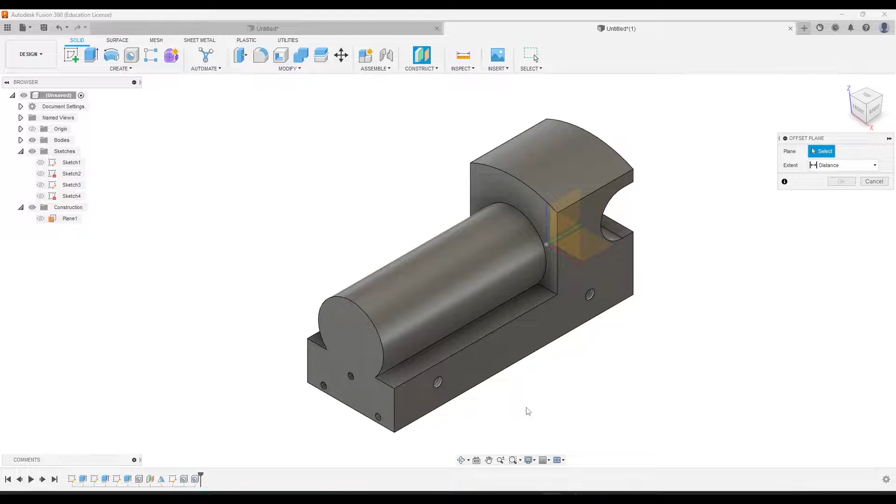Okay, so I'm going to go to the offset plane tool, and then I will click the bottom of the train. And then again, we want this plane to rest on the top of this cylinder right here. Just perfectly on the top of the cylinder. So I'm going to flip to the drawing so we can figure out that dimension. And I'm going to go down here. So again, we want the top of the cylinder.

So it doesn't give us that dimension directly. It does give us the dimension to the middle of the circle. So that is 1.375, which is most of the way there. So we want to do 1.375 plus what this distance is. And notice we're going from the center of the circle to its outer edge, so that would be the radius of the circle. So we want to take 1.375 plus the radius of the circle, which is 0.75. So 1.375 plus 0.75, which is 2.125.

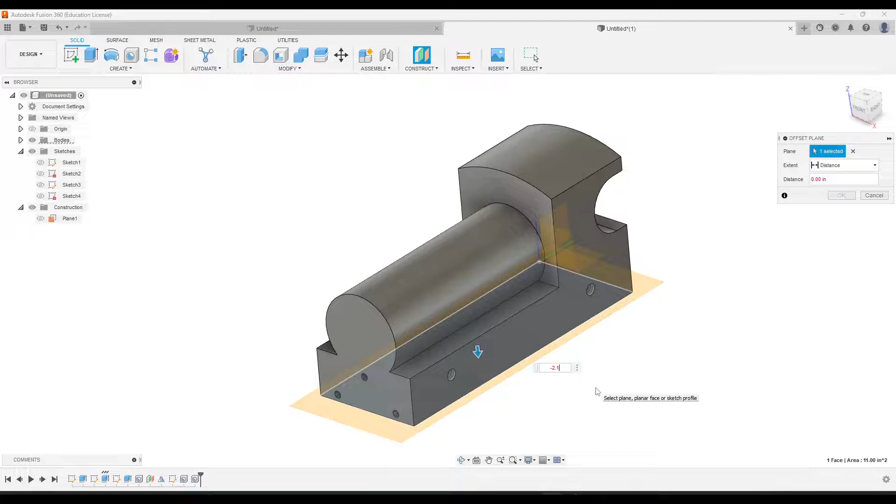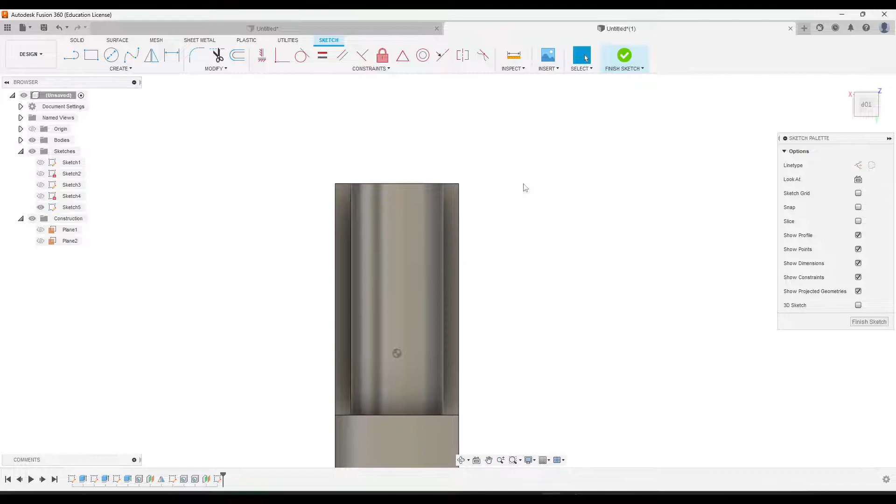So I'm going to change this. Notice it's facing down, so I'm going to make this negative 2.125. And if you notice, that should be perfectly on the top of the cylinder, which is exactly what we want. Okay, so we'll click OK. And then I'm going to click top here, and then we'll click that plane, and then we'll create a sketch. And I'm just going to rotate this to the side so I can see it a little bit better.

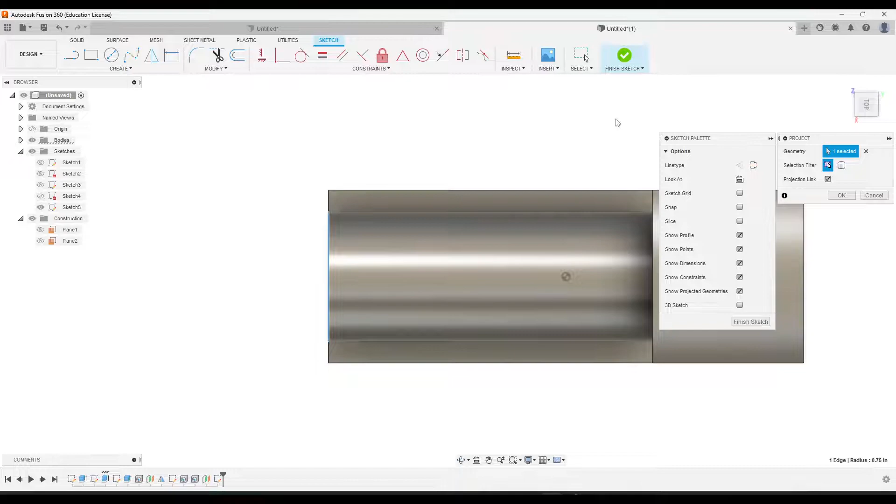Okay, so again, we need to make a circle right here. Prior to making a circle, I'm going to go to Create, Project Include, click Project, and then I will click this line here on the side because we're going to kind of reference that, and then click OK. All right, and then let's go back to the drawing and figure out what the dimension of this is. So the circle is 0.875 from that edge, and then the size of the circle is, it has a diameter of 1/2 inch.

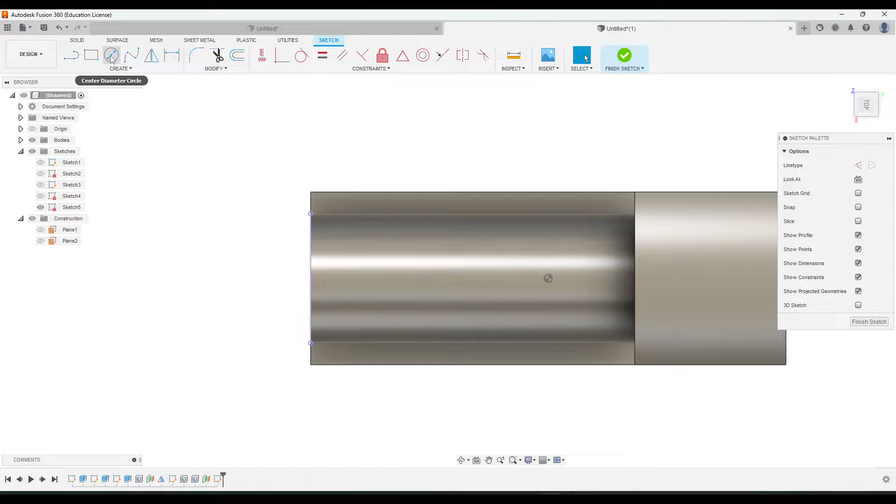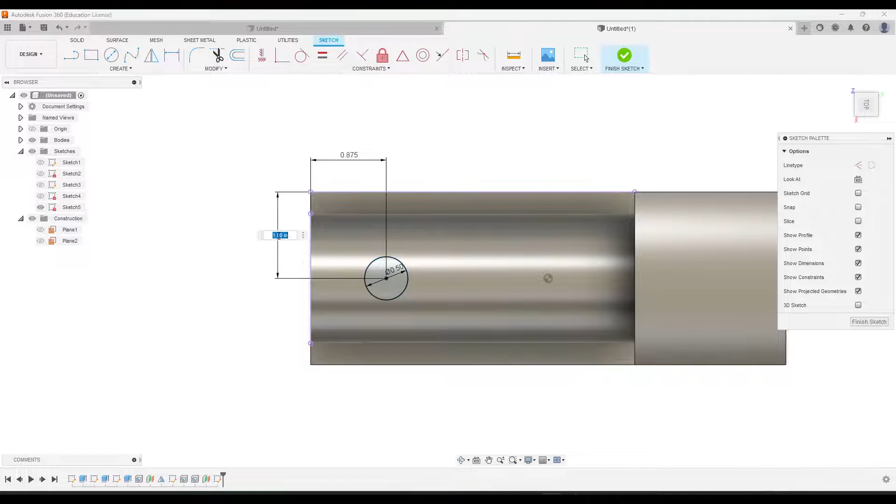So circle, and then I'll just make the circle 1/2 inch. And then again, we will dimension it from this edge to the center as 0.875. And then I'll go ahead and add the height dimension as well. And then we'll finish that. And then all we need to do now is just extrude this down. So I'll click the circle, go to extrude, change this to cut. And that needs to go down 0.25. We'll click OK.

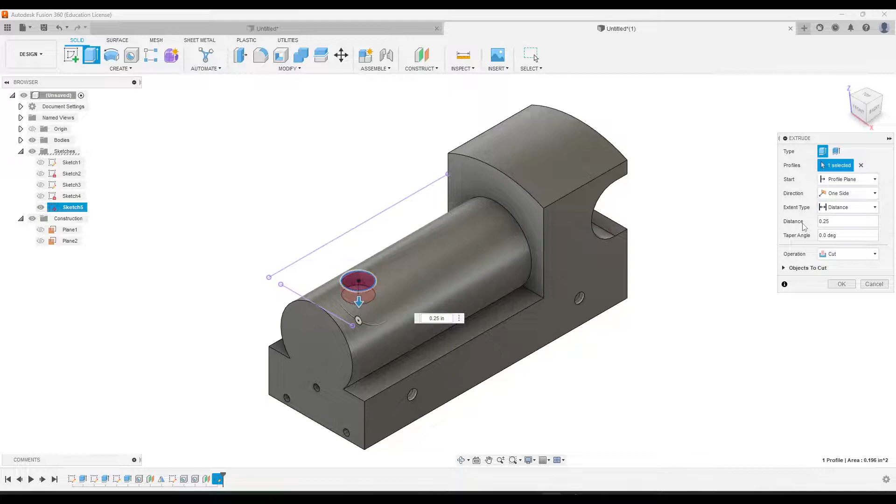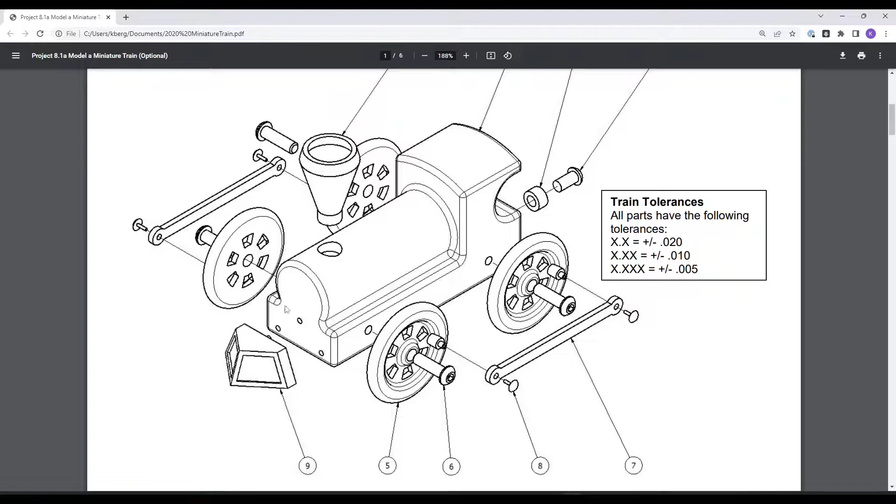Okay, so the last thing we need to do is just fillet all of the edges. So I'm just going to go to the fillet tool. And then all we're going to do is just go around and click every single outer edge. Some things you also need to make sure to click. Let me go back to the drawing actually. This part of the drawing that shows the exploded view of the train shows you basically what edges are filleted. So if you notice, it's pretty much all the external ones, also kind of the seams between the cylinder here. So I'm going to just kind of go around and click all of the edges.

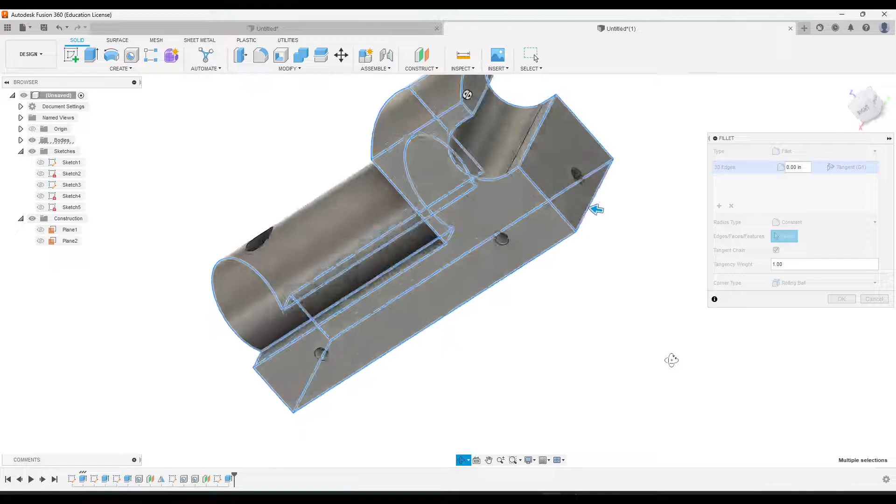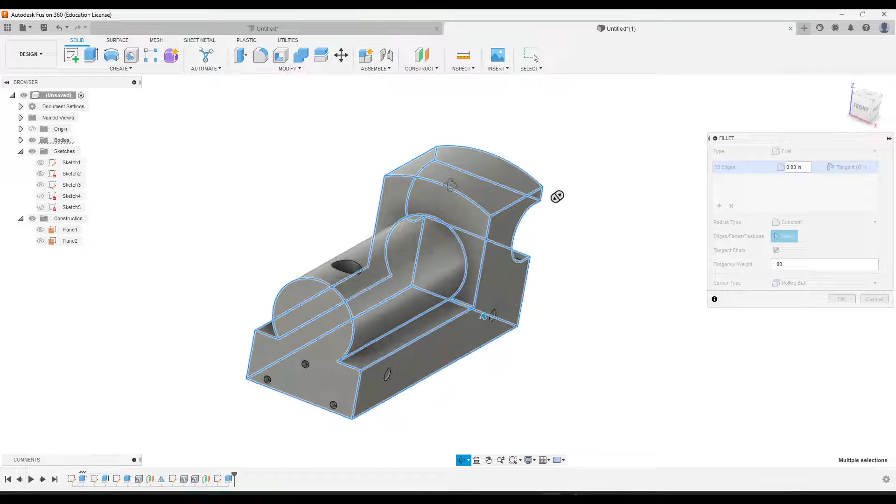Okay, I think I got all of them at this point. Some lines that are not filleted are the holes. Do not click the holes. Do not click the stack hole. And then these other lines down here, like this one, do not click that one. Just all the outer ones, I think we got. And then the diameter for this is 0.1. Okay, and then we'll just click OK. And then that is your train body completed.